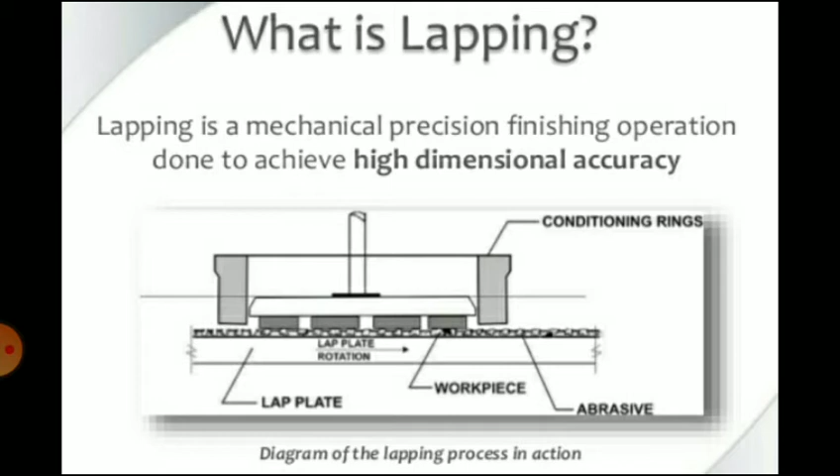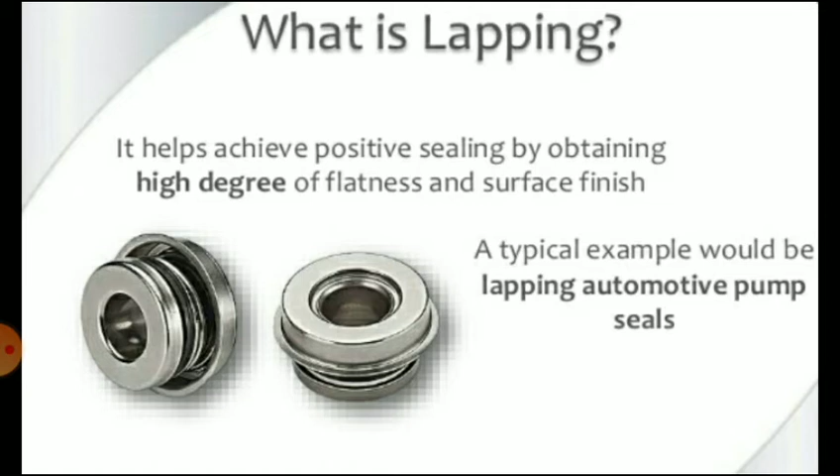Flat as well as curved surfaces may be lapped. It helps to achieve positive sealing by obtaining high degree of flatness and surface finish. The example given is lapping of automotive pump seals, done with the lapping operation to achieve high degree of flatness and surface finish.

Lapping is done to produce geometrically true surface, to correct minor imperfections in shape, to obtain fine dimensional accuracy, to provide a very close fit between the contact surfaces, and to secure a fine surface finish.

It is an abrading process used to produce geometrically true surfaces, correct minor surface imperfections, improve dimensional accuracy, and provide a very close fit between two contact surfaces. Very thin layers of metal are removed in lapping, and it is therefore evident that lapping is unable to correct substantial errors in the form and sizes of the surfaces.

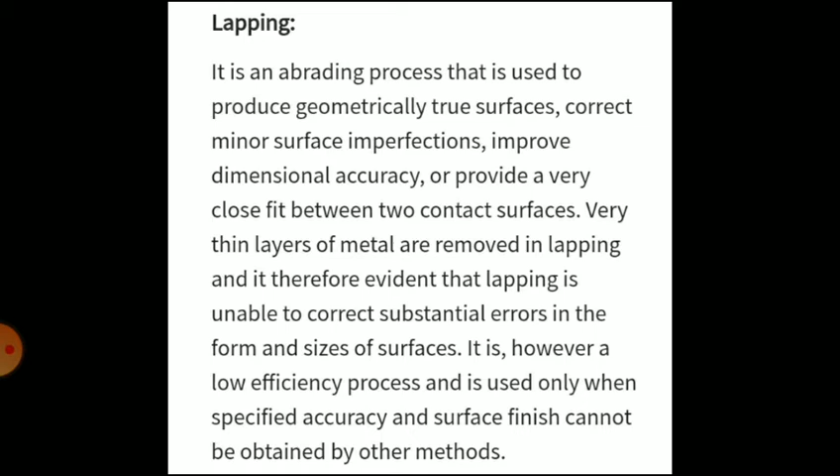It is, however, a low efficiency process and is used only when specified accuracy and surface finish cannot be obtained by other methods. Then the lapping process. For small components, the process consists of rubbing the components between the two laps. Fine abrasive particles are supplied in the form of paste or slurry between the rubbing surfaces.

Water, oil, or kerosene is used as a carrier of abrasive grains. The carrier fluid is periodically added to prevent drying. A machine consists of two heavyweight cast iron circular laps or discs. One lap disc, the bottom one, rotates and the other remains stationary.

The components are carried in a slotted plate which oscillates between the two lap discs. The oscillations of the carrier plate are so geared that the components follow a different path in each oscillation. This ensures uniform wear of the faces of the lap disc. For lapping curved surfaces, special devices are needed.

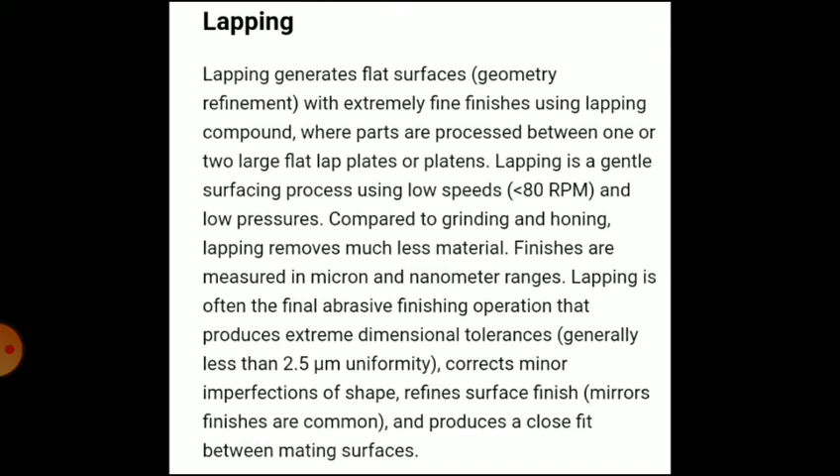Lapping generates flat surfaces with extremely fine finishes using lapping compound, where parts are processed between one or two large flat lap plates or platens. The lapping media, compounds, pastes or slurries consist of fine grain, loose abrasive particles suspended in a viscous or liquid carrier.

Examples of carriers include soluble oil, mineral oil or grease. The lap or lapping plates are typically cast iron, copper composites, fusible alloy or pitch. Water, oil or kerosene is used as a carrier of abrasive grains, and that mixture with the abrasive particles is supplied in the form of paste or slurry between the rubbing surfaces.

Now the abrasives used for lapping: first is silicon carbide, which gives good results on cast iron surfaces. Second is alumina for finest lapping. Third, for small components, you can use diamond dust or boron carbide, and others are ferric oxide, chromium oxide, etc.

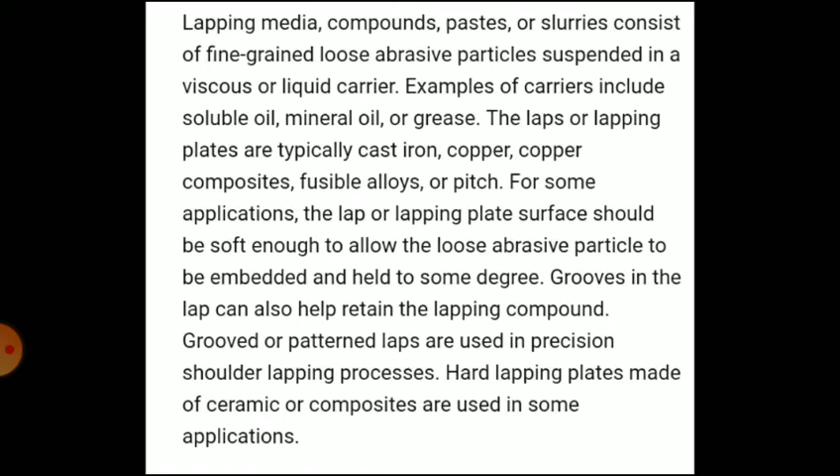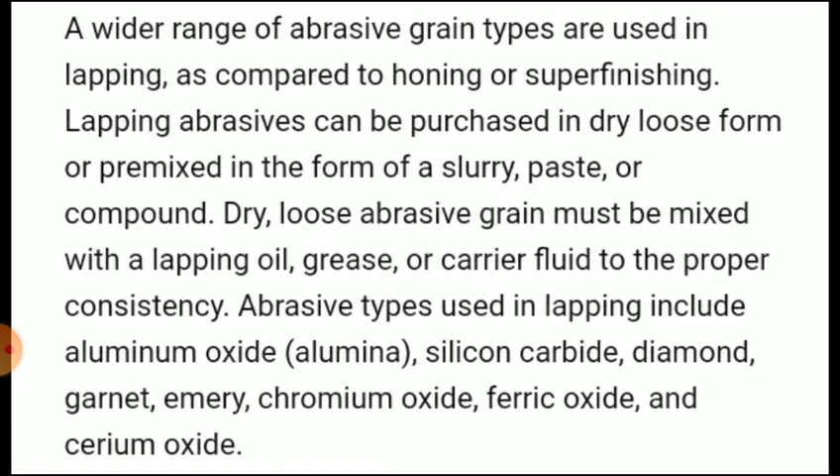In lapping, the material removal is usually less than 0.025 mm, and rough lapping may remove as much as 0.075 mm. In this slide, the different abrasives given are aluminum oxide, silicon carbide, diamond, garnet, emery, chromium oxide, ferric oxide and cerium oxide that you can use as abrasives.

The workpiece to be lapped is placed in between the two laps, and then the abrasive slurry in the form of paste is supplied between the two laps, and the surfaces will be rubbed against the rotating laps. The carrier fluid used, such as kerosene oil, can be used to prevent the drying of the abrasive slurry.

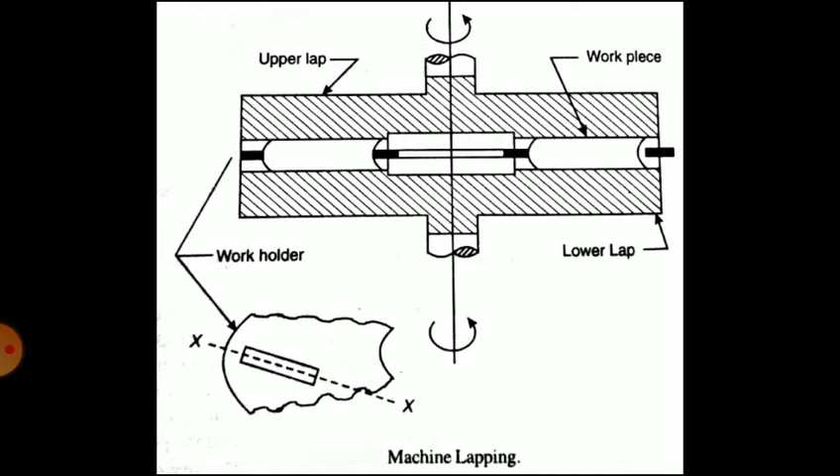So this is regarding the lapping operation. Sufficient lubrication between the sample surface and the grinding polishing surface is necessary, because that is for enhancement of cutting. The correct lubricant improves the cutting process and yields the smallest scratch depth and lowest deformation. It is used to reduce friction and for cooling.

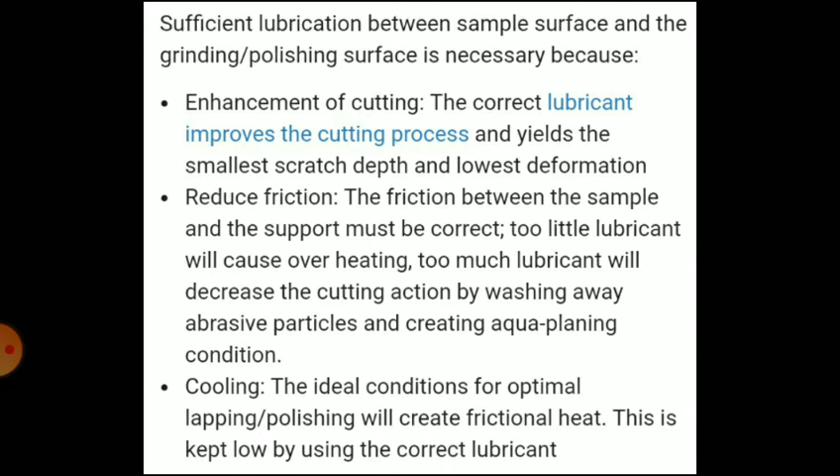Then the next process, that is the honing process. Honing is a grinding or abrading process, or you can say it is a finishing process, in which the tool called a hone carries out a combined rotary and reciprocating motion, while the workpiece does not perform any working motion. Most honing is done on internal cylindrical surfaces such as automobile cylinder walls.

The honing stones are held against the workpiece with controlled light pressure. The honing head is not guided externally but instead floats in the hole, being guided by the work surface. It is desired that honing stones should not leave the work surface and stroke length must cover the entire work length. So it is a grinding or abrading process.

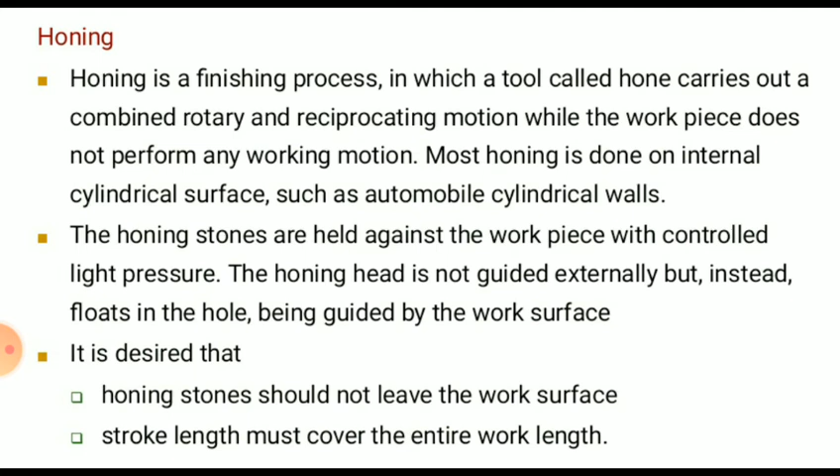In this process, very little material is removed. This process is used primarily to remove the grinding or tool marks left on the surface by the previous operation. The cutting action is obtained from abrasive sticks made of aluminum oxide or silicon carbide mounted in a mandrel or fixture. So you can see this is a honing tool, and these are the abrasive sticks, shown in red color, mounted on a mandrel or the spindle.

Honing is a finishing process performed by the honing tool, which contains a set of 3 to a dozen or more bonded abrasive sticks. The sticks are equally spaced about the periphery of the honing tool. The sticks or stones, shown in red on the honing tool, are held against the work surface with controlled light pressure, usually exercised by small springs. Inside there are small springs due to which the pressure is applied on the abrasive sticks.

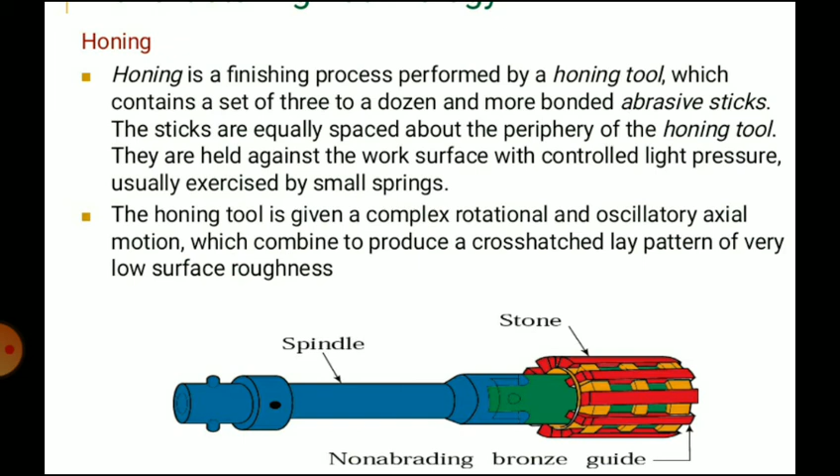The honing tool is given a complex rotational and oscillatory axial motion which combine to produce a crosshatch lay pattern of very low surface roughness. You can see the diagram, there is a work part. To finish the internal holes in a workpiece, the honing process is used. This is a honing tool that rotates and simultaneously reciprocates in a hole. So two motions are included in the honing process: a reciprocating motion of the tool and the simultaneous rotary motion of the tool.

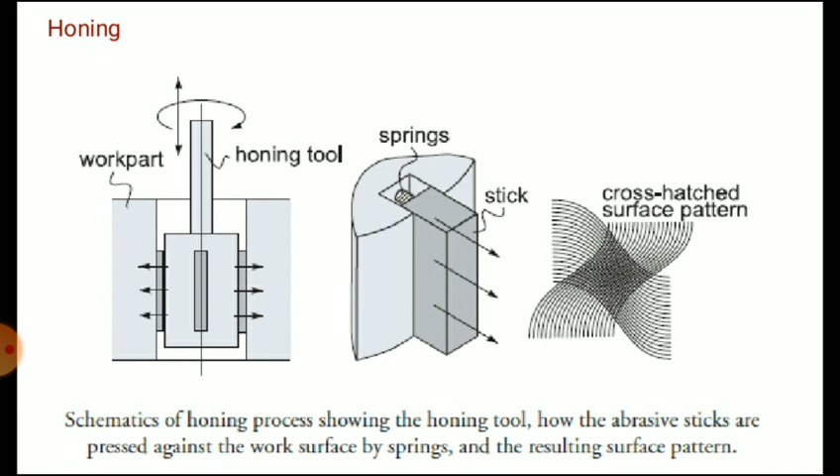You can see the springs to apply the pressure on the abrasive sticks. In the second diagram, inside there are the springs that apply the pressure on the sticks, and this is a crosshatch surface pattern. After finishing the workpiece, you will get this type of surface pattern. So this is a tool, and this is attached to the vertical honing machine.

The cutting action is obtained from abrasive sticks mounted in a mandrel or fixture. The tool rotates and simultaneously reciprocates on the surface of the workpiece and slowly abrades the surface to the desired finish and accuracy. Special honing machines, both horizontal and vertical, are often used for production work. A tool consists of several stones arranged at equal distance around the circumference. The stones can be moved radially outwards by means of expanding cones, or springs apply the pressure on the stones.

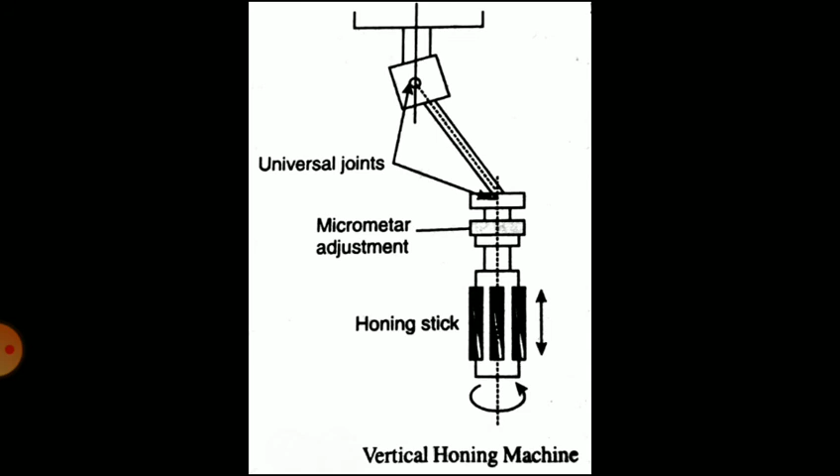The tools are made self-aligning by using a double universal joint. You can see there is a double universal joint, so that the tool is self-aligned. Honing corrects out-of-roundness errors. It corrects the axis of the bore as well as any taper in the diameter of a hole. It gives crosshatch marks or lines on a surface which are helpful in enhancing lubrication and hence reduction of wear.

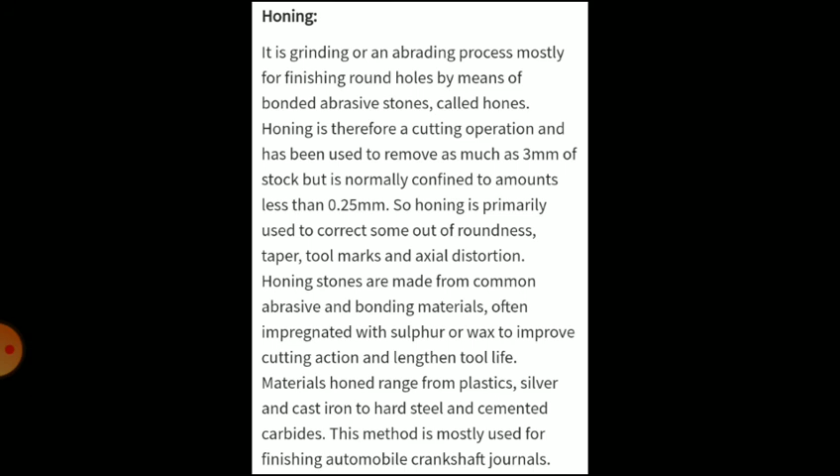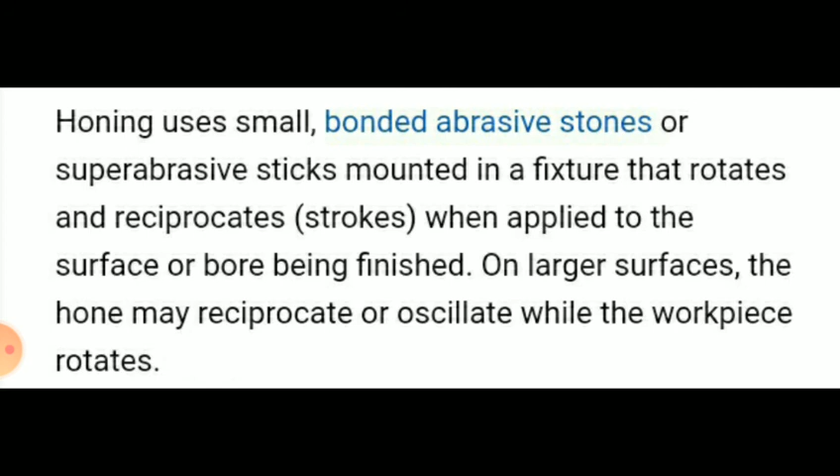So this consists of the abrasive stones. On larger surfaces, the hone may reciprocate or oscillate while the workpiece rotates. So this is regarding the lapping and honing process.